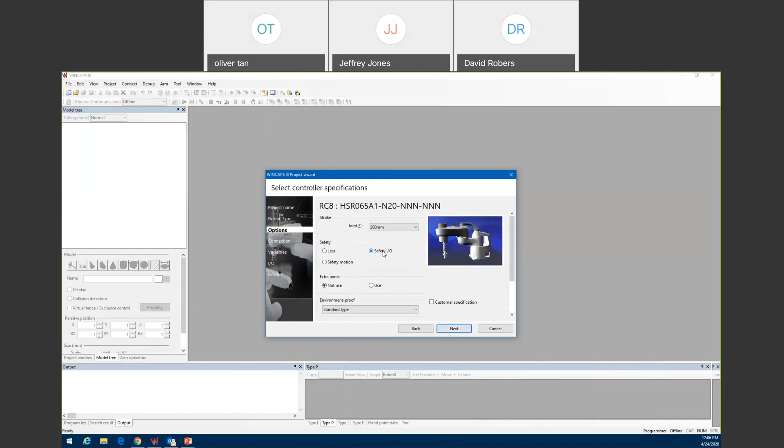I've got to make sure that I'm under the right robot controller category, RC8. The robot type I'm going to select is the HSR, and then just the HSR 065 base model. I know I want to use a 200 millimeter stroke Z-axis. Some of the options that you see, we're just going to kind of click through these. Not all these options apply to this presentation or this webinar.

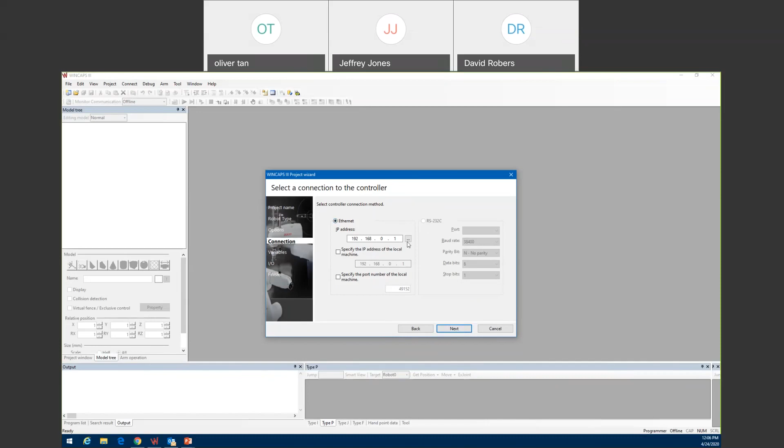Then you select the Ethernet IP address or your field bus communication that you want to communicate to the controller with using your PC, either Ethernet or RS-232. And then your variable sizes, I just generally go to default, and these variable sizes can be adjusted accordingly as you get into programming.

And then your I/O device assignment, this is where you would actually select your field bus device, how you are going to communicate, whether you're going to use just discrete I/O, PLC I/O, or Ethernet IP I/O. I'm just going to leave it at mini I/O. Before I finish, it's going to tell me all the options I selected. So once I confirm everything, I can click finish. It is loading the project up.

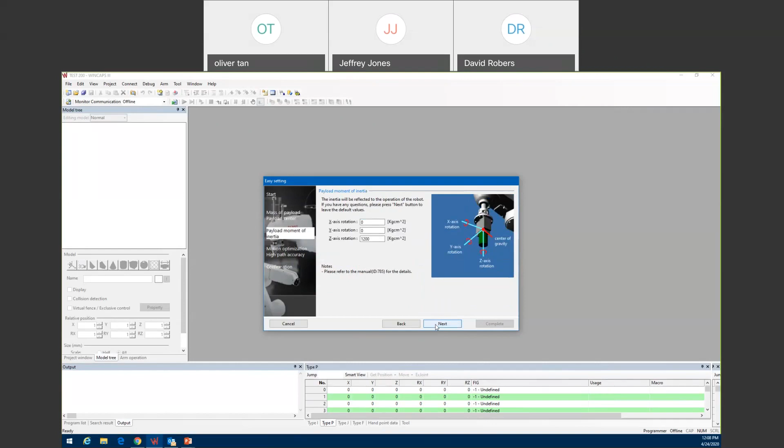Then there's a few more things that we can go through, these easy settings. And once again, these easy settings can be adjusted accordingly after the fact, after you get your project created and your simulation done. I know that my payload is less than a pound, so I'm going to adjust the total mass at 1 kilogram, and leave all the moments of inertia as they are.

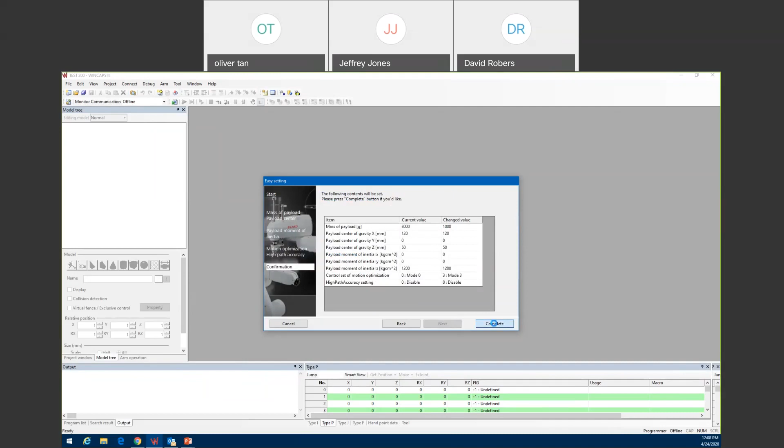Then I want to adjust the motion optimization to mode 3, and what this does is optimizes the motion for each one of the commands that I give it for a linear move or a point-to-point move. And then just complete. Once I'm completed, I want to go back and make sure I save anything that I've done.

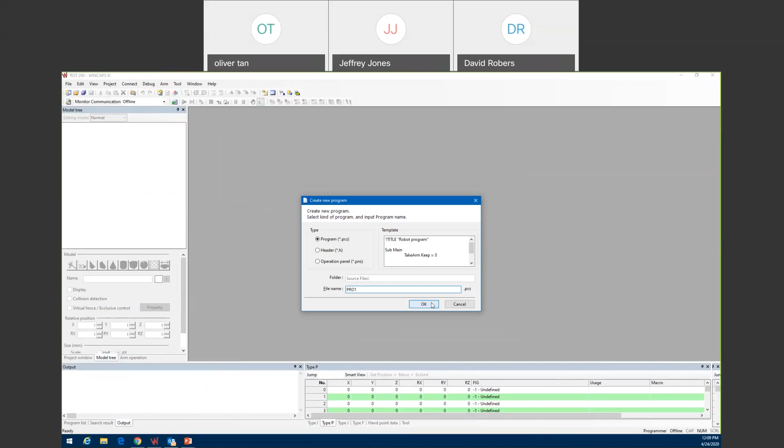So now I'm ready to go ahead and create some simple code. So I go to Project, Add Program, name the program, Pro 1, click OK, and it creates the program window for me. In order to start programming, I'm going to be programming just 2 simple points. I'm going to be using two position variables, P2 and P3, and we'll populate the coordinate data into these positions in a little bit.

So what I want to do is go ahead and start writing 2 lines of code. So I write 1 line, and what I want to do is duplicate that so I can drag across it. It's just like any other Word document or whatever. You can drag across it, copy it, I can paste it, and then go in and adjust the position variable.

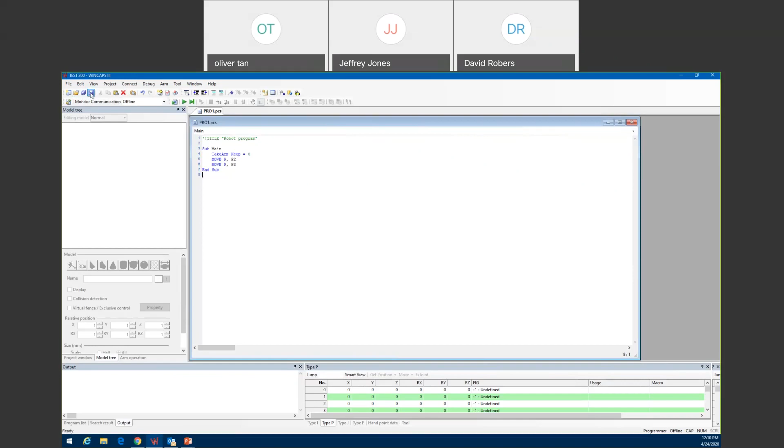This is all the code I'm going to write to do a simple pick and place from one conveyor to the next. But we will be building on this program a little bit too as I go on to show you the first part of the simulation. So then now I got my code. What I want to do is go over to the ARM view window. And when you click on the ARM view window, it's going to bring up a separate window to show the robot model that you have selected.

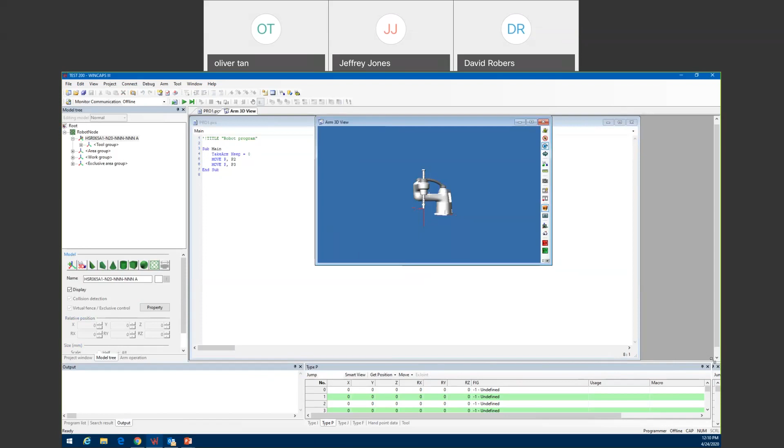And in this window, I can move the robot around by just clicking on the left mouse button, and I can move it up and down, rotate it. I can position it differently. I can zoom it in or out. But then if you come over, now I'm ready to teach some points. Come over to the left-hand side of the screen to the arm operation. You have operation mode, you have joint, which I can move each individual joint.

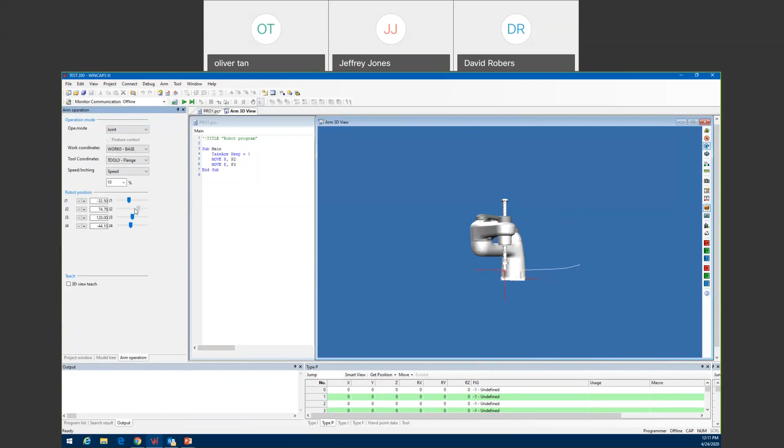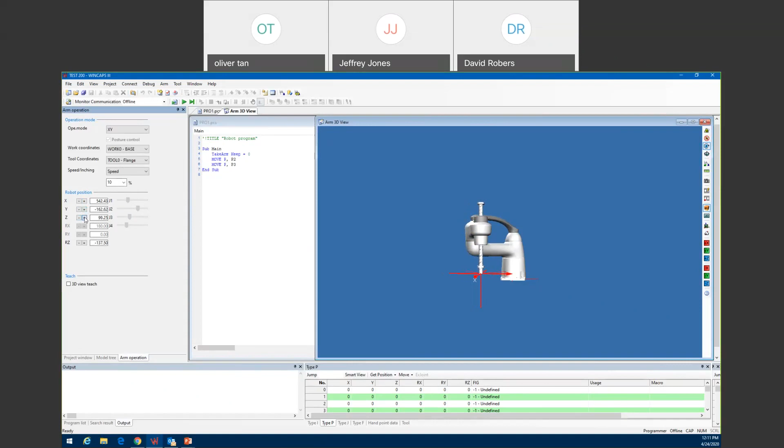And then the T-axis. Then XY, it's a coordinated motion of each axis, maintaining the tool posture. And another way to move the robot around is you can come over and drag on the arrows to move it into a relative position where you may want to teach it.

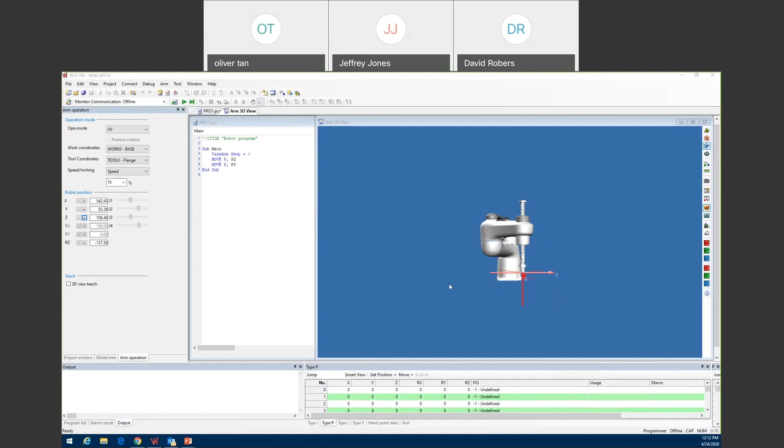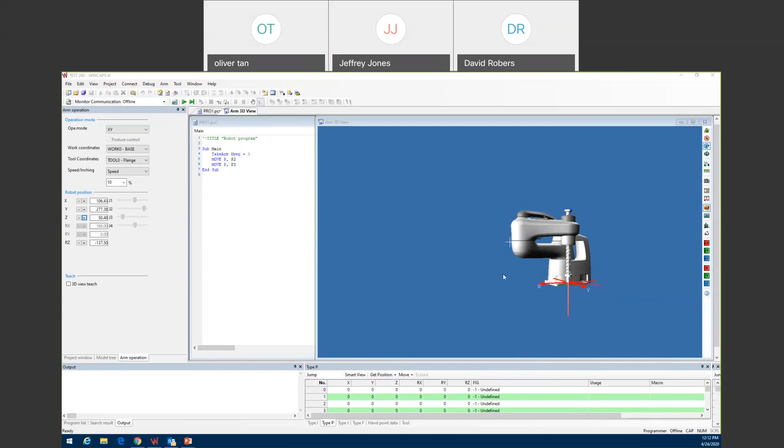What I need to do is I need to teach a couple points. Looking at the base of the robot, the center line of the robot, that is our work coordinates off of 0, 0. So my incoming conveyor is going to be to the right of the robot, and my outgoing is going to be to the left of the center of the robot. So I want to move my x-axis back a little bit and then drag my y over to a position to where I can pick it up and then bring z down and set that position.

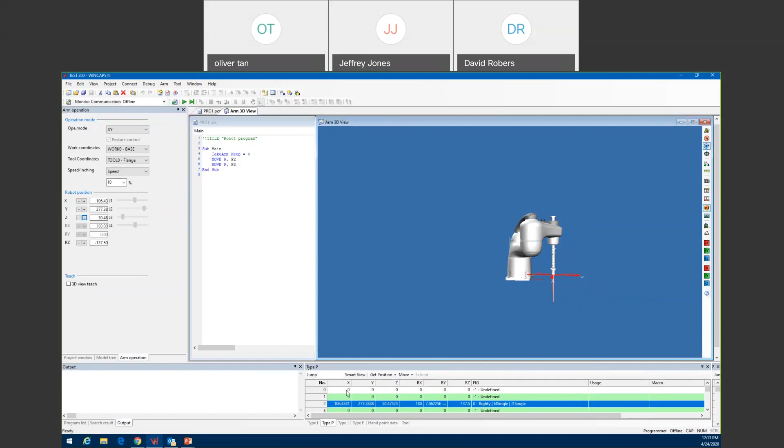Once I have the robot at a position where I think is relative to where I'm going to be, my pick position is going to be position 2, or P variable 2. I highlight the P variable 2, I get position, it's going to read the current position data here, and then once you OK it, it writes it into that position variable. So now I need to do the same thing with my place position. And place it somewhere in there and do the same thing, repeat, highlight my position 3, P variable 3, get the position, and then record it.

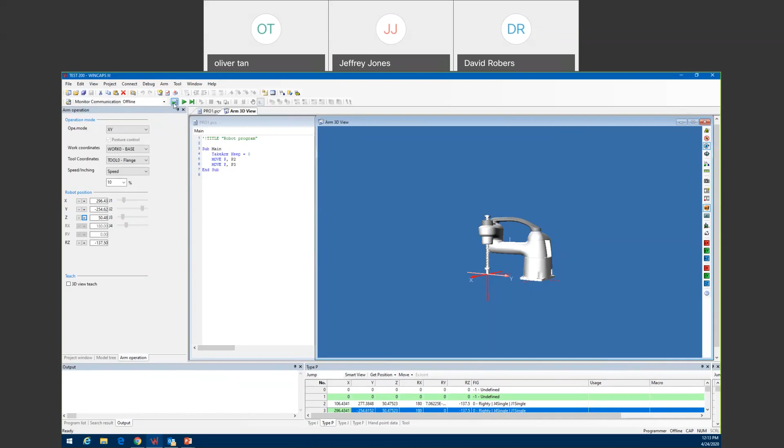Now I have position data stored in both of these, the P2 and P3, and now what I can actually do is I can go ahead and run this code. In doing so, I have to prepare the program so it can run, and then press the play button, and then just do a continuous run of it. And of course, it's only running at 10% speed. I can speed that up.

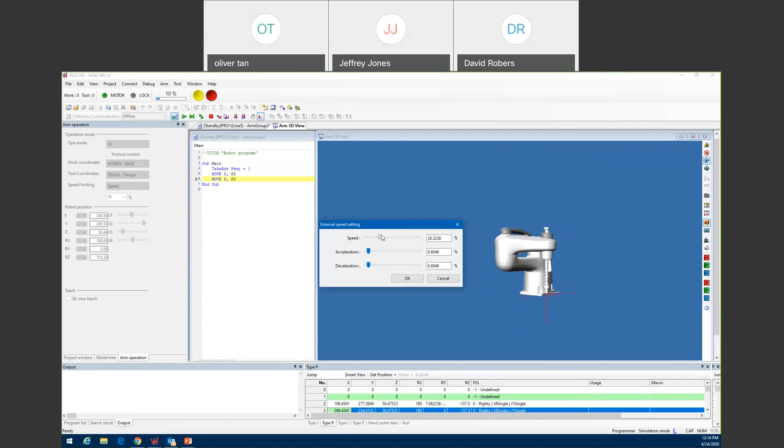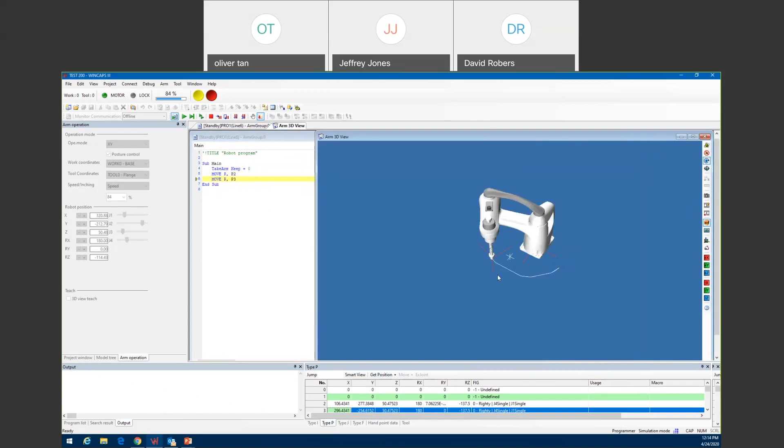And you can kind of see the motion path. It's just going from P2 to P3, and you can see it's in an arc motion, mainly because I'm doing a point to point, and it's trying to get from one point to the other in the fastest path that it can go. Of course, my pick and place motion is not going to look like this when I'm done with it. I can't move on a horizontal plane from one point to another to pick a part and place it.

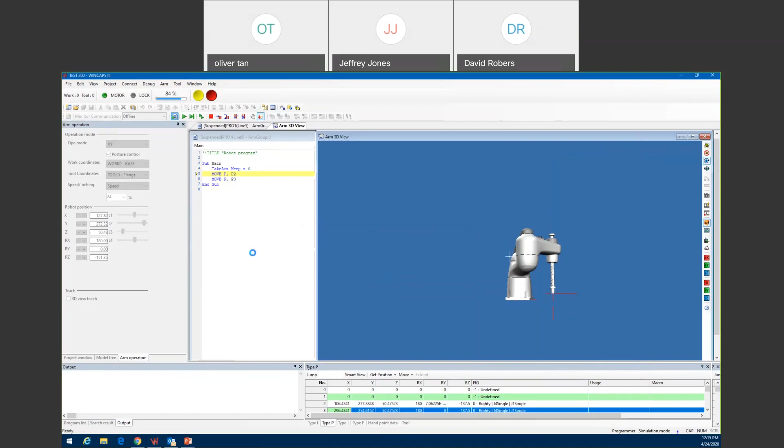So what I'm going to do is I'm going to stop my program, reset it, and then go in and add some code to what we call an approach. I'm going to add an approach move. And what the approach does is allows the robot to move over the target position at a defined height.

I'm going to tell it to move over P2 at 100 millimeters above it. So once again, what I can do is I can take this line of code, and I'll need to do the same for the place position as well. Copy it, paste it above my move, go in and change my target position to match my actual target position.

So now I'm able to approach over each position by 100 millimeters. And then once I get above it, then it's going to move down to P2. But there again, I don't want the robot to move on a horizontal plane back over to the approach. I want to be able to bring my Z-axis up and clear any obstructions that might be in the way. So I'm going to use a command that we call depart.

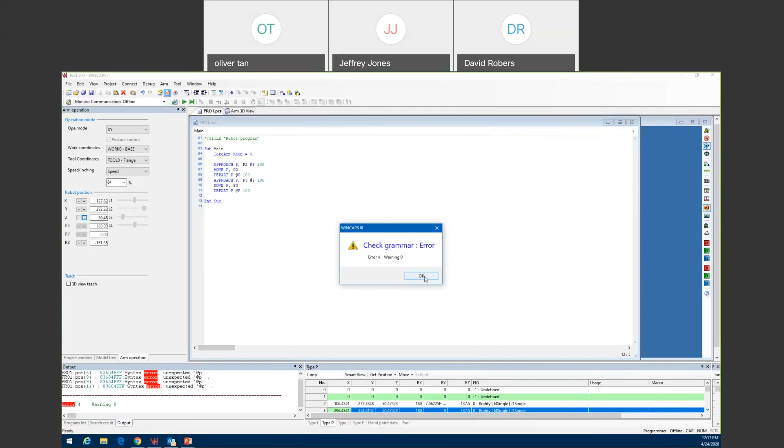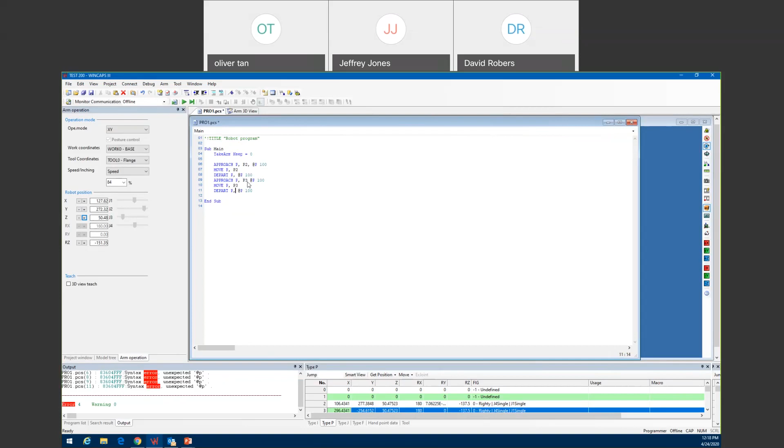Of course, just to verify there's no syntax errors, I can come up here and I can check my program. And of course, I do have 4 errors. So what I have done is left out a couple commas. And that took care of my errors. I have no errors, so I should go back up and save my program. Bring up my arm view window and prepare the program to run.

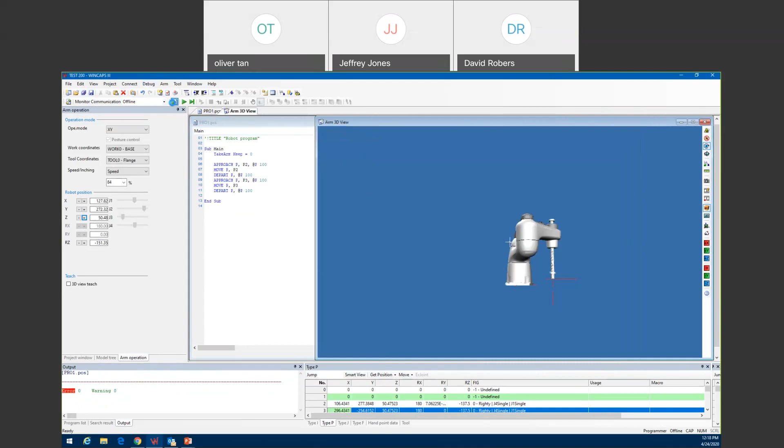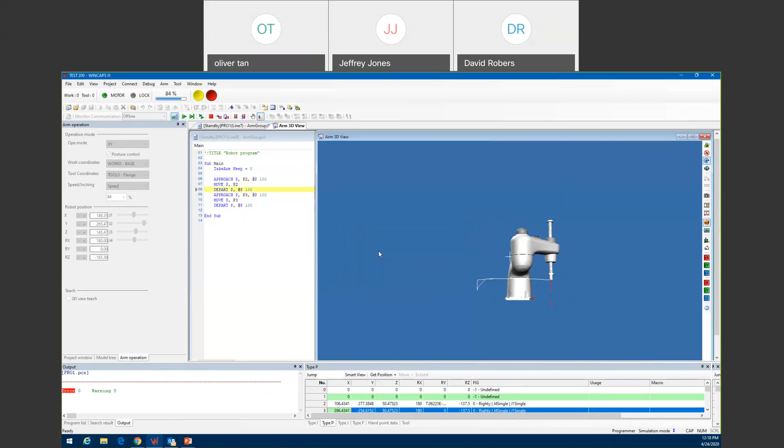You can see that I'm not just moving on a horizontal plane. It's actually approaching over my target positions at 100 millimeters, moving down to the target position, and departing 100 millimeters from that relative position that it was at.

Now, to simulate this a little more accurately, the robot would have an end of arm tooling on it, and a gripper, possibly either a pneumatic or a servo gripper. And in order to simulate that, for the timing, to get a true cycle time, I can go in, and after it moves down to each target position, put some delay there, so it emulates the gripper opening or closing, looking at your open and close confirmation switches.

So we just put in a command. It's called delay, and I'll put 200 milliseconds. That may be a little long. You can adjust that. Once again, I want to check my program. No errors. Save it, and then prepare it to run.

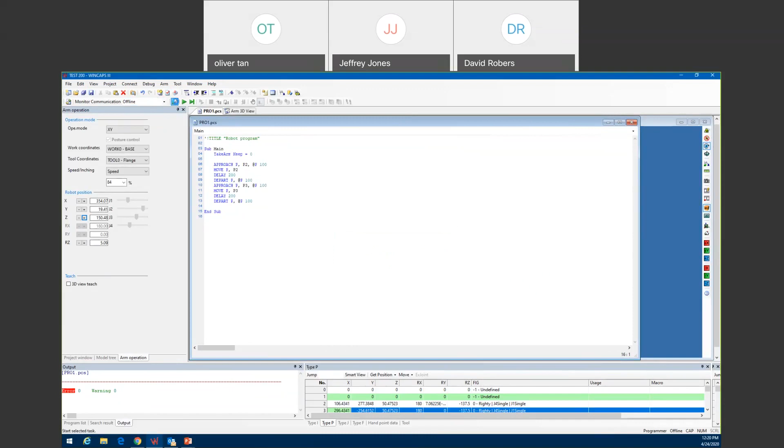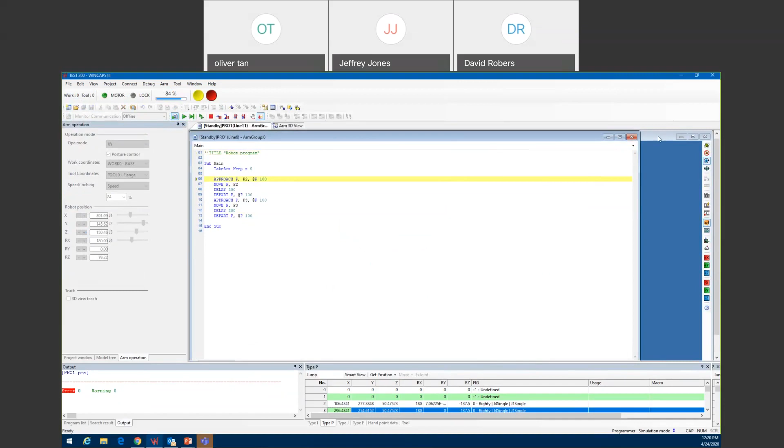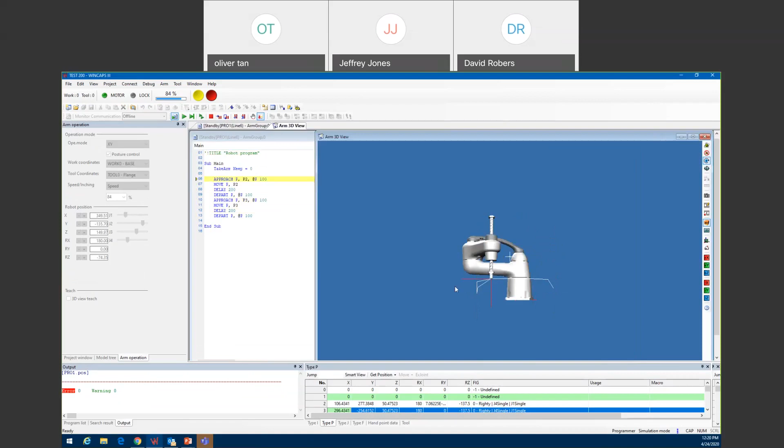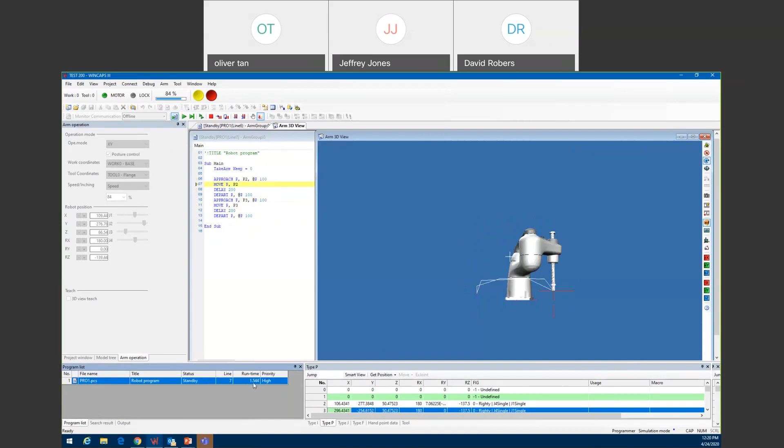You can see it has a little bit of a lag now as it gets down to each target position before it departs up away from that position. So since I'm running, I want to be able to have an idea what my cycle time is. If you go down to the bottom left-hand corner under program list and click on the program list tab, you see I have PRO1 running, and the current cycle time that it is running from P2 to P3 is 1.544 seconds.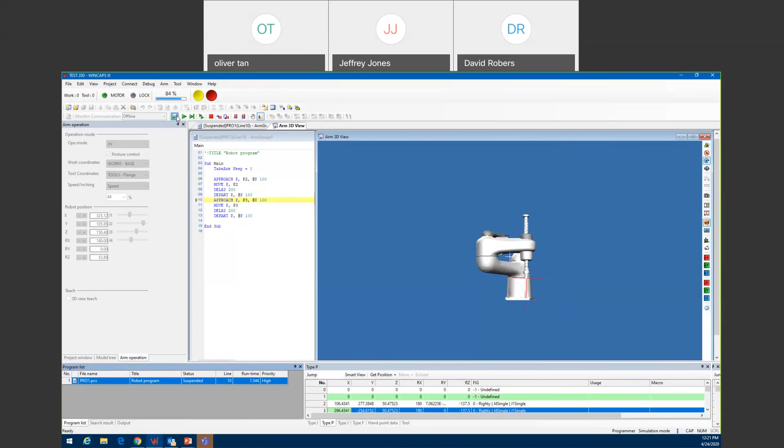This is one way to accurately judge what the cycle time is going to be, and it is fairly accurate. Okay, so now I've got my motion in my code written. I want to make this look more like my actual application is going to be. There's tools that we can use in our model tree to lay in objects to emulate a conveyor or the product on a conveyor. We can lay them around the work coordinates of the robot and also attach them to the tool end.

What I'm going to do is add some objects to make it look like two conveyors in there. The incoming conveyor will have an incoming part, and the outgoing conveyor will have a part. And then I'll actually add a part to the end of arm tool just to show you the orientation as it's picking it up, and then the T-axis is rotating 90 degrees to place it down on the place conveyor. So first thing I want to do is make sure I'm under my robot node. I'm going to place the incoming conveyor first.

And all of your objects, when you bring them in, they're going to be green. And after you select that object that's been brought into your screen, you do have the option of changing the color. So just to define the color a little bit, I'm going to change the incoming conveyor to orange.

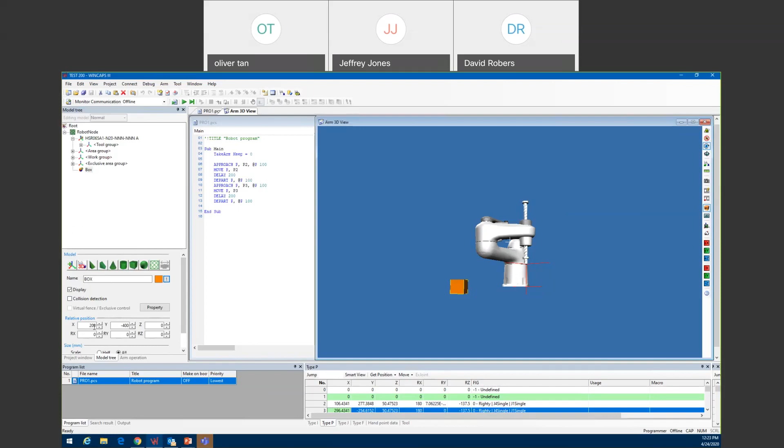I'm going to change the relative position. Yep. You drag this down, and so you can see the relative position and the scale as well, the size. But I'm going to change the relative position on the x-axis to 0, the y-axis to 500, and then the z will be 0.

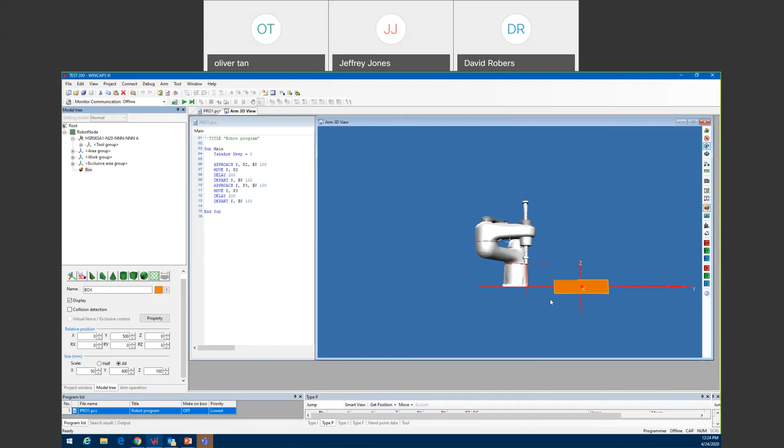Now I need to size that conveyor so it looks like a conveyor. So I'm going to size the X to 50, size the Y to 400, and then the Z I'm going to leave at 100. So there I have an incoming conveyor, similar to an incoming conveyor.

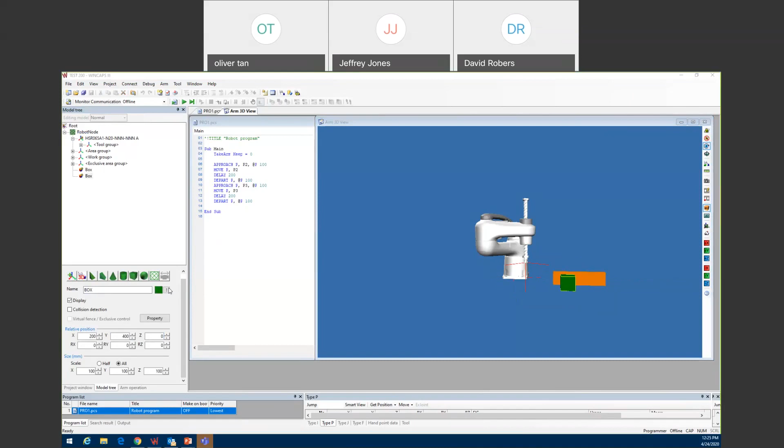Yeah. So now I want to go in and add my outgoing conveyor. So I'm going to select the cube again. And I think it's hidden. I think it hid it behind my other conveyor. Nope. Okay, so now I'll select the cube. That's the outgoing conveyor. I'll change the color. Well, maybe. Okay, there we go. Change the color of the outgoing conveyor.

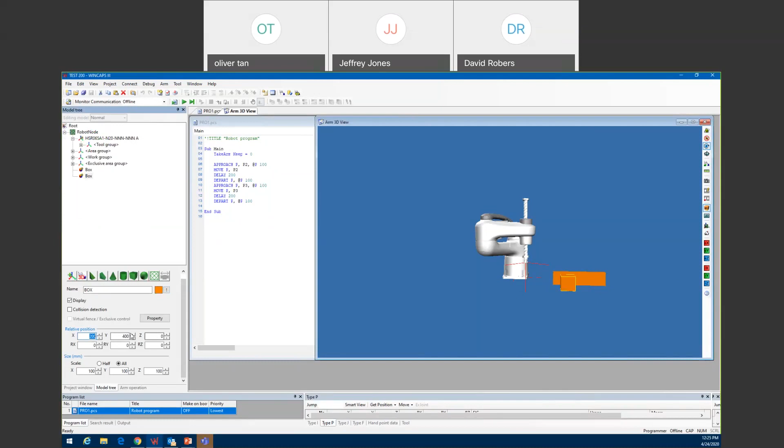Now set the relative position for the outgoing conveyor. The x-axis is going to be 200. The y-axis, I'm going to set it at a negative 400 to bring it on the other side of the robot arm. Leave the Z at 0, and then again scale the outgoing conveyor: the x-axis is going to be 150 millimeters.

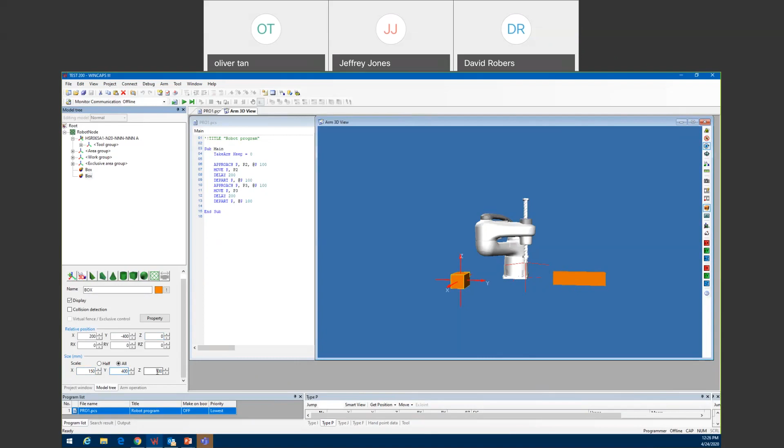And then in the Y is going to be 400. And then the Z is going to maintain at 100. So you can see the two different conveyors. I've got part coming in this conveyor, and I'm going to rotate it 90 and put it on the outgoing conveyor. Now, what I want to do is place a part on my incoming conveyor in the orientation that it's going to be coming in.

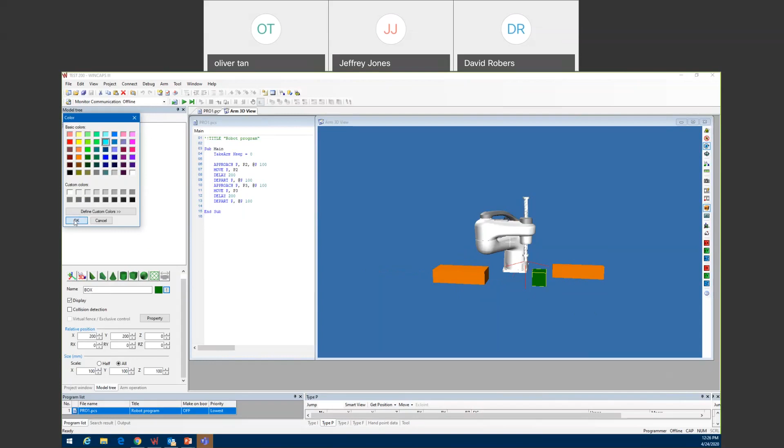Select my robot node and then the part. And I want to change the part color so everything doesn't just run together. And then now I'm going to change the size of the part. 50 in the X, 100 in the Y, and then 50 in the Z.

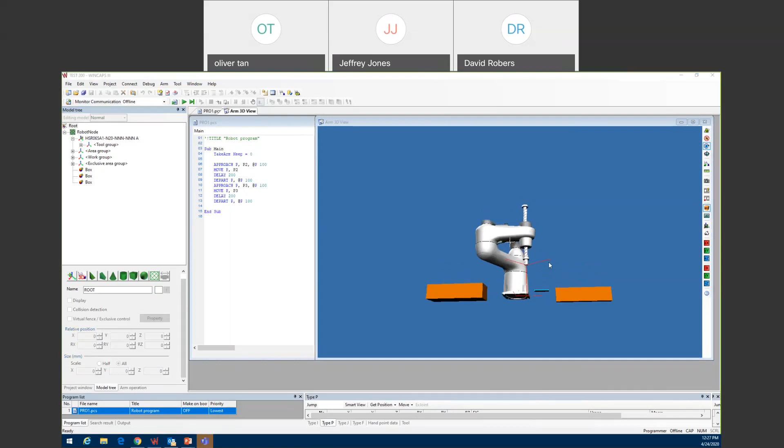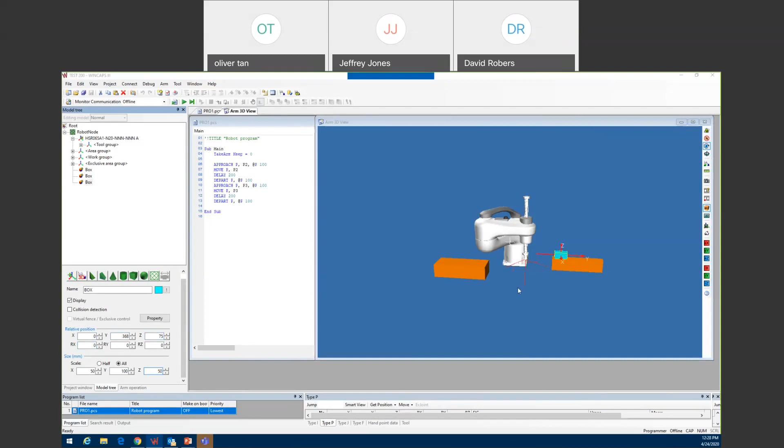Now I'm going to place it onto the conveyor. Change the relative position of it to the conveyor. The X coordinate to 0. The Y coordinate to 368. And then the Z to 75. And I need to adjust this. I'm supposed to be 50 on there. So now I have my part sitting on the incoming conveyor.

I want to do the same thing to my outgoing conveyor. I'm going to place a part, select my robot node, select my cube. There again, I want to change the color. And then size it is going to be 50 in the X. Also, it's going to be 100 in the Y and 50 in the Z. So the parts look similar.

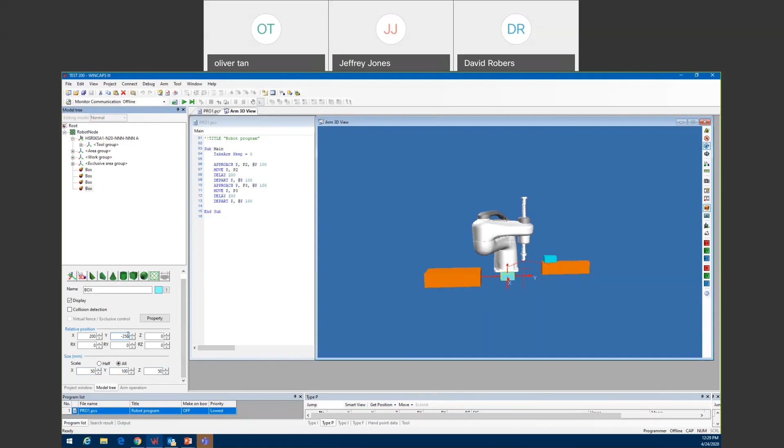Now I want to change the relative position to put it on the outgoing conveyor. It's going to be 200 in the X. It's going to be a negative 250 in the Y. And then 75 in the Z. But now what I got to do is take into account I need to turn that part 90 degrees. So I'm going to go down to my RZ. I'm going to rotate my RZ by 90 degrees and bring it around. So now I have my pick and my place positions.

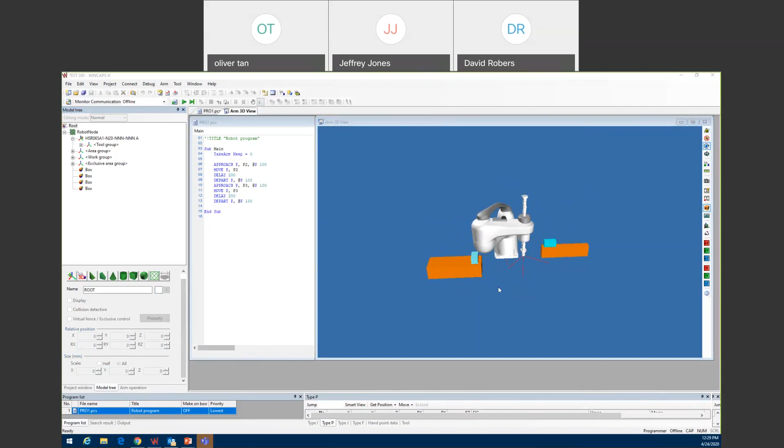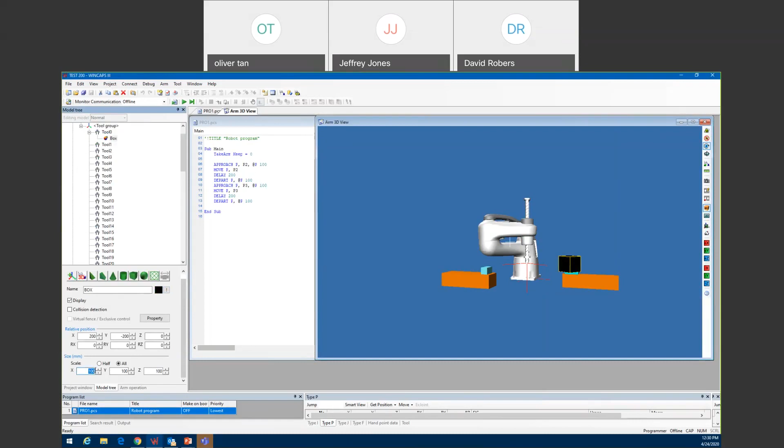Now I need to go in and put a product on my T-axis or my end of tool. I'm going to come over to my model tree under tool and go to tool 0. And then I'm going to add a cube. And then, there again, change the color. Change it to black just to stand out. Now, I need to adjust my size of the tool product. It's going to be the same size as that's on the incoming and the outgoing conveyor. It's going to be 50 by 100 by 50.

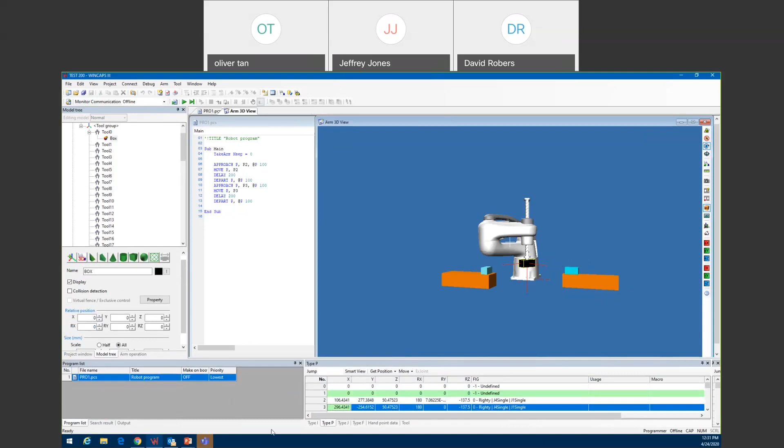Now I need to place that on the end of the tool. The reference on the end of the tool is actually 0, 0, 0. So I'm just going to adjust X, Y, and Z to 0, which brings it to the end of the arm. So now I'm going to have to go back and reteach my position 2 and 3 again. So we kind of zoom it in here a little bit.

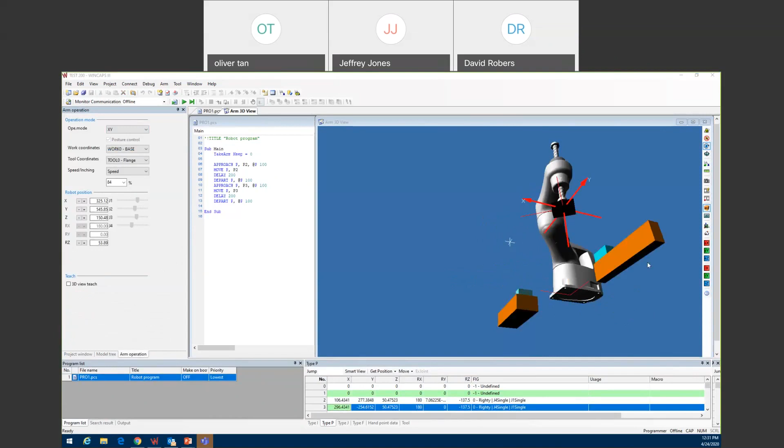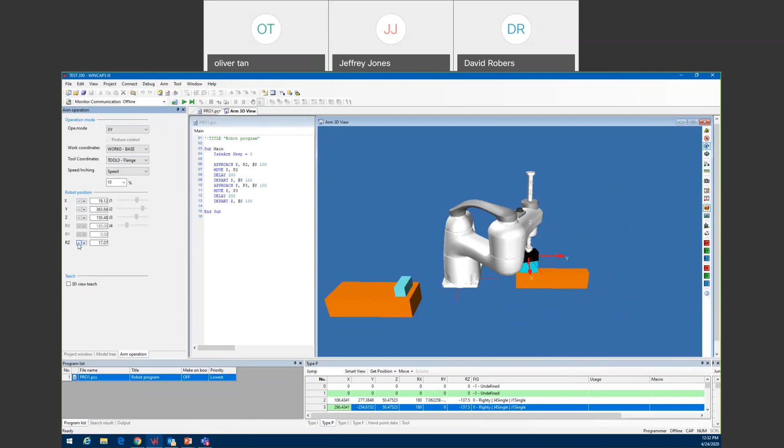Go back to arm operation, and then I'll drag the robot over. I can get it close, and then I'll use the slider switches to get it a little more. I'll come over, I'll leave it in XY. Slow it down a little bit so I can get a little more refined position. I want to rotate. Get it to lay on top.

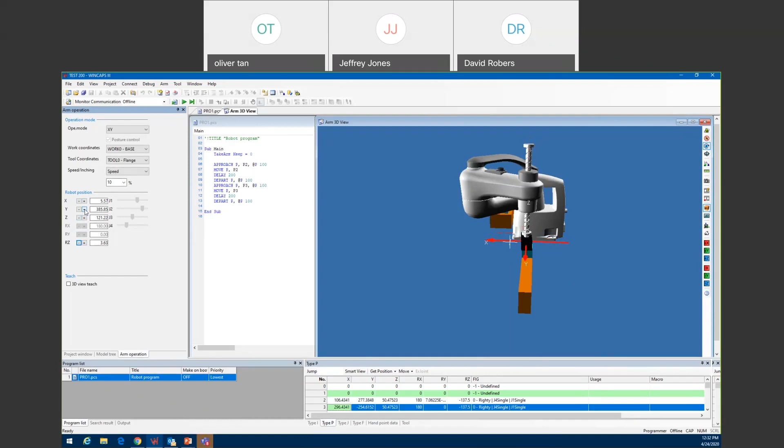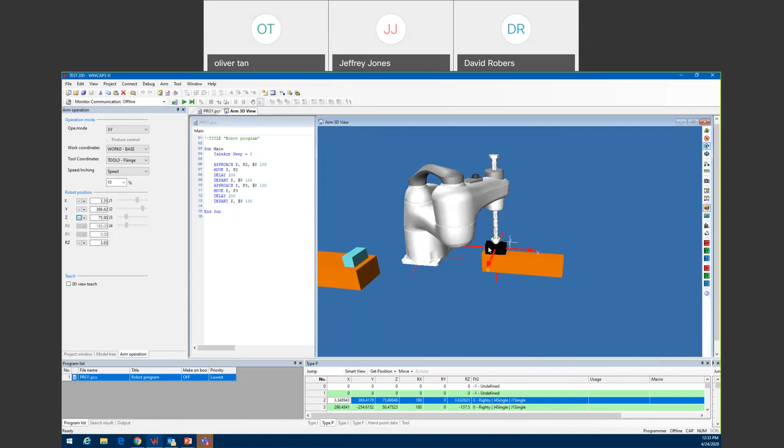Okay, so it's close to being lined up there. I'll bring the Z down on top of the conveyor. And then I want to come back down to my position 2 variable, get the position. And then I want to do the same thing for the place position.

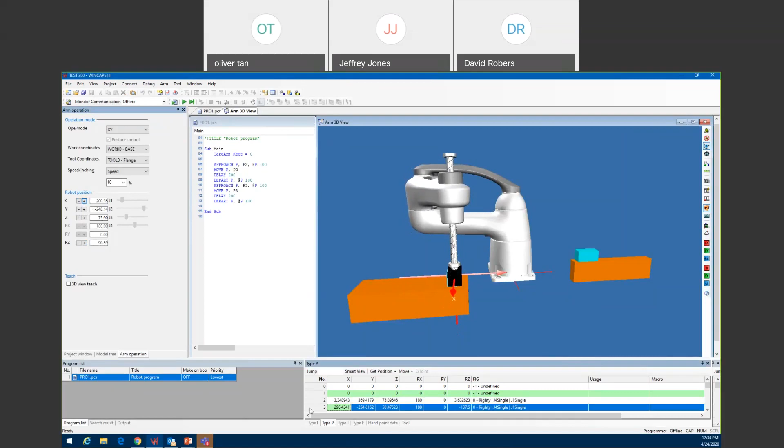So the place position is close. Record the P3 position and OK. So now I should be able to run my simulation with these objects laid into the simulation just to kind of get a feel for what it's doing.

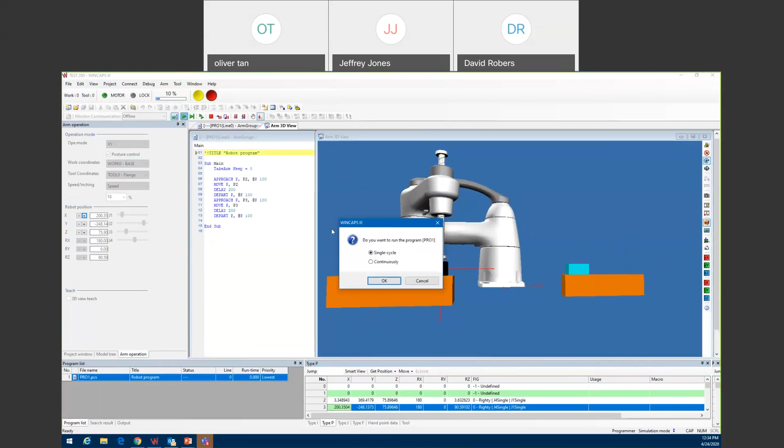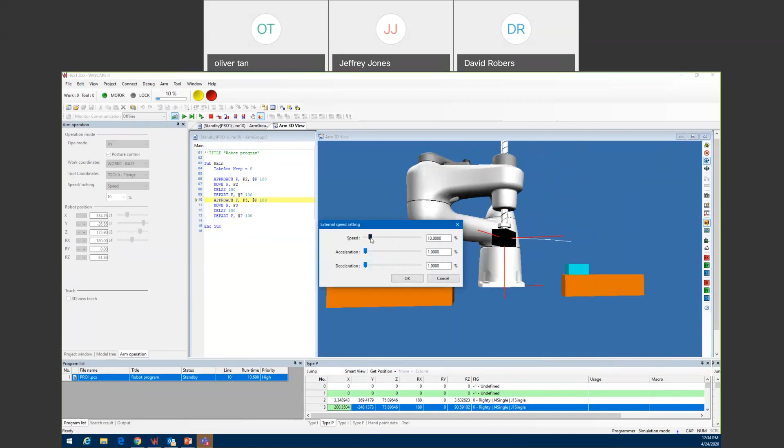Of course, it's only running 10% right now. We'll open that up. And at 10%, it's a 10-second cycle time. Bring it down to, I'll set it up at 100. And that is how you create a simple simulation.

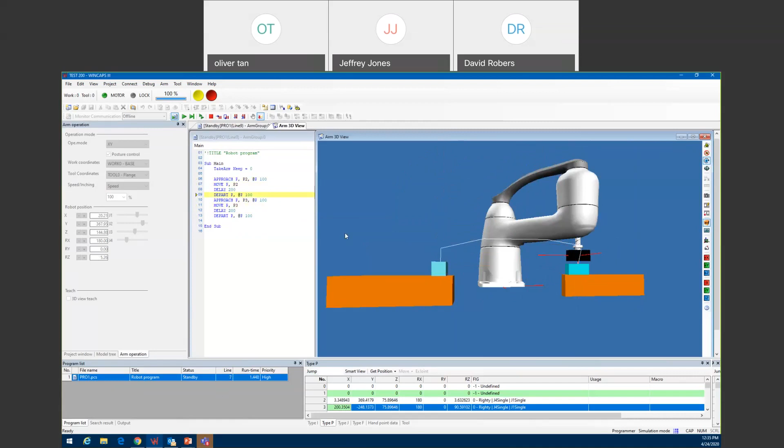You also have the capability, instead of using the objects that are in the model tree, of bringing VRML files and DirectX files into your simulation layout. Another neat thing is if you need to, maybe you're in with a customer going through the simulation, and your customer doesn't have WINCAPS, but they want to be able to show their management a video of this simulation running.

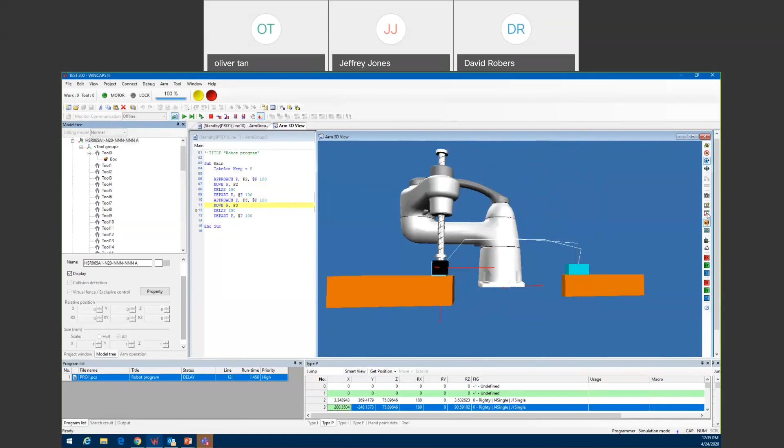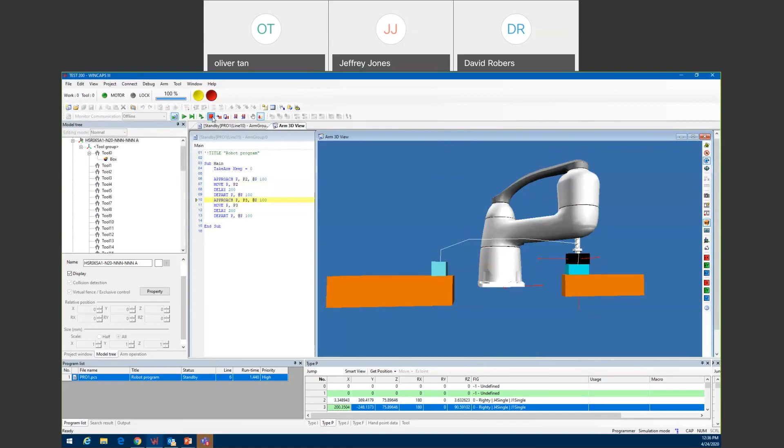We do have over on the right-hand side, you can go in and do a recording of the simulation, record it, and it stores it in an AVI file. I'll save it. The AVI file will be stored in the folder where your project is stored. So you can go in and copy that AVI file out and send it to your customer so they can share with their chain of command or their management as well.

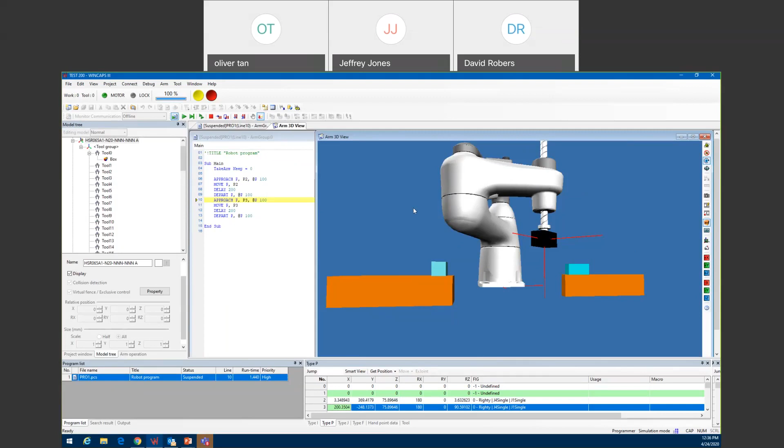But that's pretty much it. That's how to create a basic simulation, how easy it is, and to even add objects in and around the work coordinate of your robot as well as your tool coordinate. So I will bring the PowerPoint presentation back up.